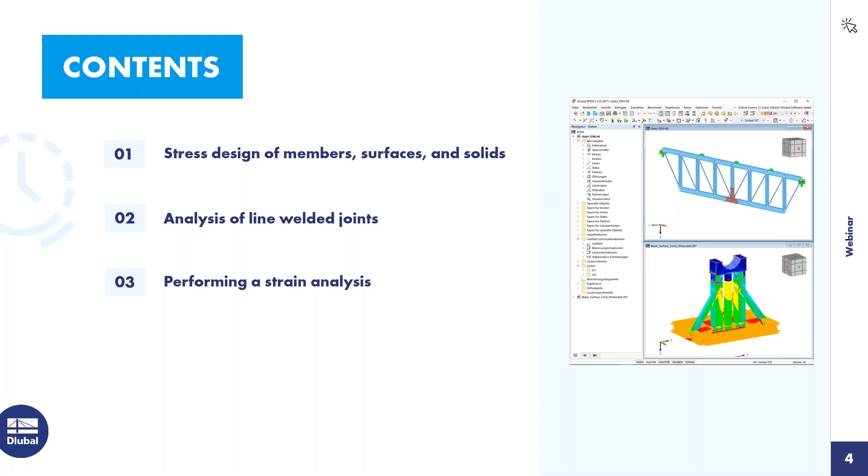In the last chapter, I intend to show the strain calculation, of course, in combination with the plastic material behavior. I will do it as a live demonstration, so I didn't prepare any additional PowerPoint slides, so I will jump directly into the program. And today I also would like to work with predefined files in order to keep the focus on the essential topics.

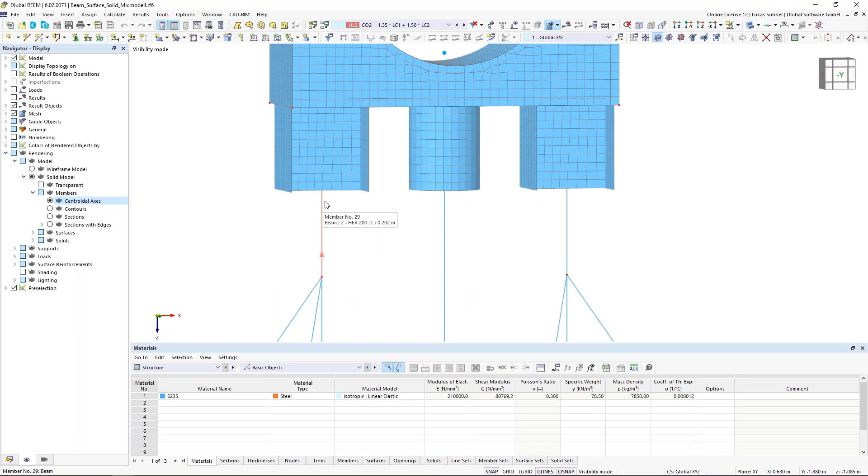What do I have here? I have a mixed structure here, mixed by the meaning of I have here a member structure, surface elements, and also solids. Let me quickly change the rendering so you can easily see the differences. On the bottom, we have this member structure. Then I converted a certain part of my members into a surface structure, as you can see here. It's just the continuation of my members if I display them again. And on top of that, I have my solid model on which I will place some loads.

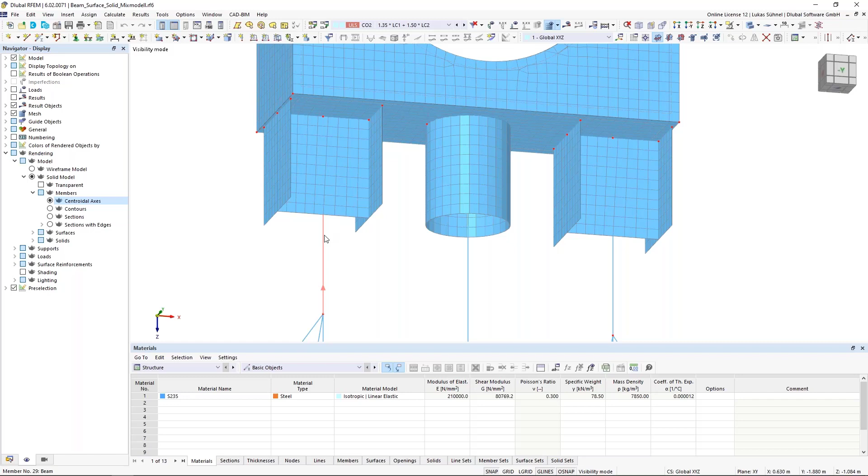Regarding the modeling, which is maybe also interesting to know, we have here this. So in general, we can model members, surfaces, and solids in one structure, which is already quite nice. And if you think about the load transfer and the correct transfer of the stiffness, you have to take care of some things when you have 1D elements and 2D elements. By simply converting these members into surfaces, as I did it here, often you don't have a correctly defined connection. You can see it on the left.

The surfaces in that area are now basically supported on only one FE node, the FE node where this member connects to the web of this beam. That is of course not correct. You would definitely get singularities in that area, and the stiffness transfer is also not correct.

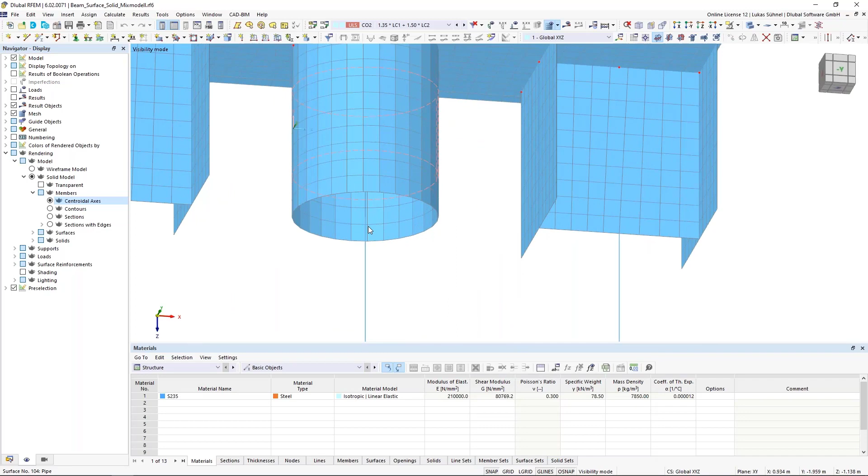Another example can be found in the center. We have here a pipe section. And when you convert a pipe section into a surface, you get, of course, the pipe surface. And in such a case, you have no connection at all. You can imagine the member is in the center of that circle, and the surface is of course not connected to that member at all. So here we also have to do some modifications in the modeling to have it properly connected.

And I have it here, I just didn't show it so far. So I will cancel my visibility mode, and the connection can be done in, let's say, 2 ways. I can use so-called rigid surfaces, and this simply will transfer all my forces and my deformations that I have in this beam, or also vice versa in that surfaces, via a stiff surface onto the other side.

In the center, it's even more crucial, because with this stiff surface or rigid surface, I'm connecting my member with my surface. Before, I had no connection at all. And again, of course, all deformations and internal forces will be transferred from the beam to the surfaces equally, let's say. An alternative modeling is visible here on the right-hand side.

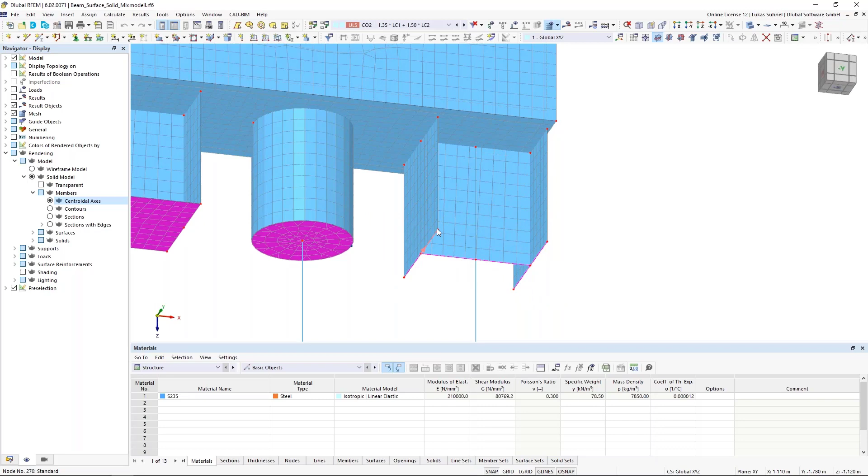Instead of using a rigid surface, I simply assigned rigid members onto the boundary lines of my surface model. A member with a member type rigid, and it works similar to my rigid surface. So this is how you can connect a 1D element with a 2D element. The rigid surface or rigid member may help you here.

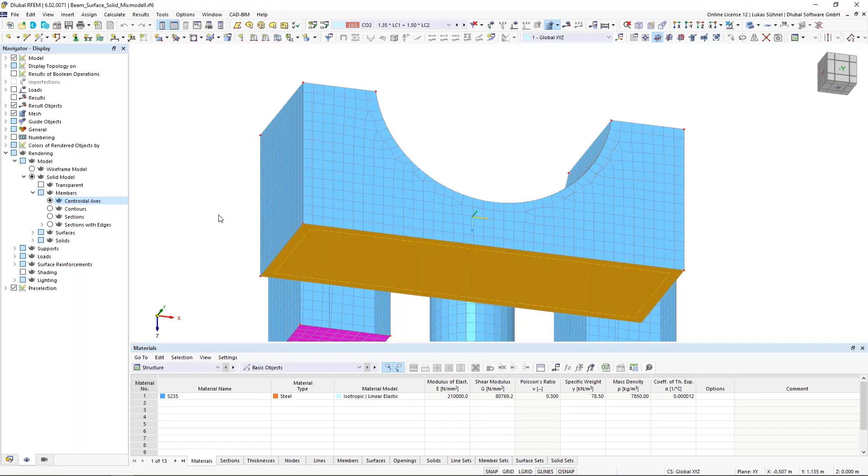Regarding the connection of a surface model with a solid, well, this is quite easy. The surfaces are defined by the boundary lines. These are those lines here, which you can see, and these lines are placed inside the boundary surface of that solid, and we have a so-called automatic object detection in those surfaces.

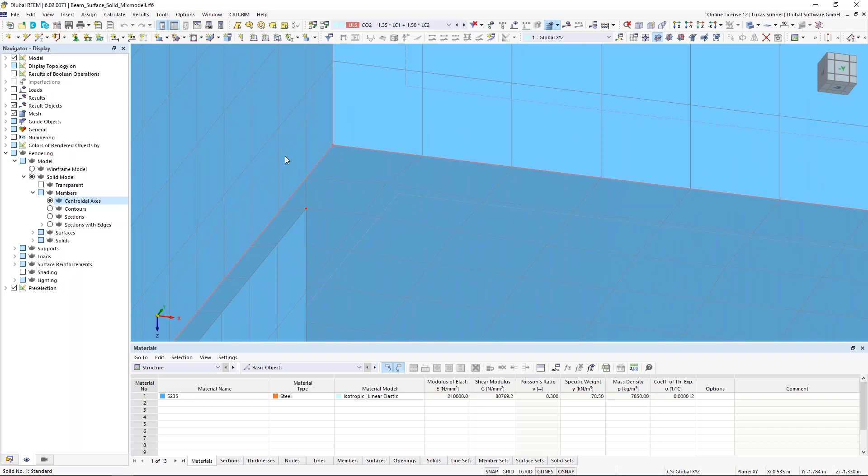So the surface detects that there are lines placed inside the surface, and if that's the case, then the FE mesh generator will automatically consider those lines when the mesh will be generated. So we have a fixed connection between those lines or these surfaces and the solid. So far regarding the modeling.

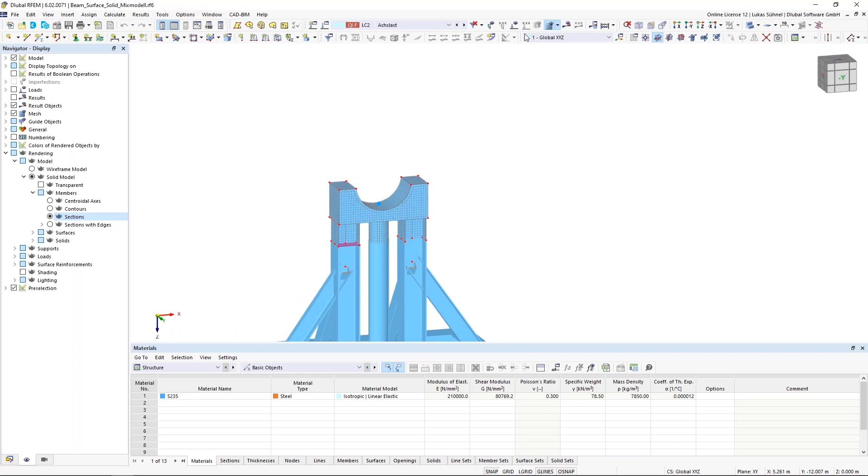Regarding the loading, these are German names, never mind. I have 2 load cases. I have my dead load case here, and then some load in my live load case. That's all I want here in that example. And of course, we have the combination of those load cases using an ultimate limit state design situation and a serviceability limit state design situation.

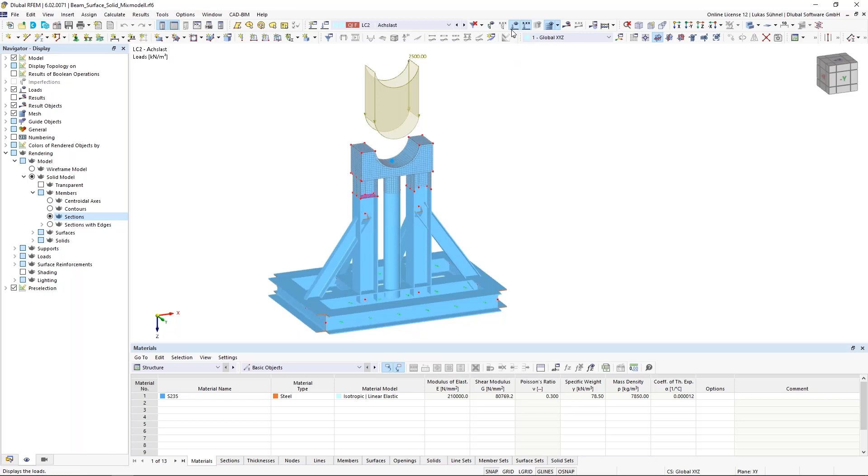Now, if we want to design such a structure, we have, let's say, 2 main designs that we have to run. We have to run a stress analysis or a cross-section check for our objects, and we have to run a stability design. Regarding the stability design, I would like to take a look at the results first. So that's what I will do now.

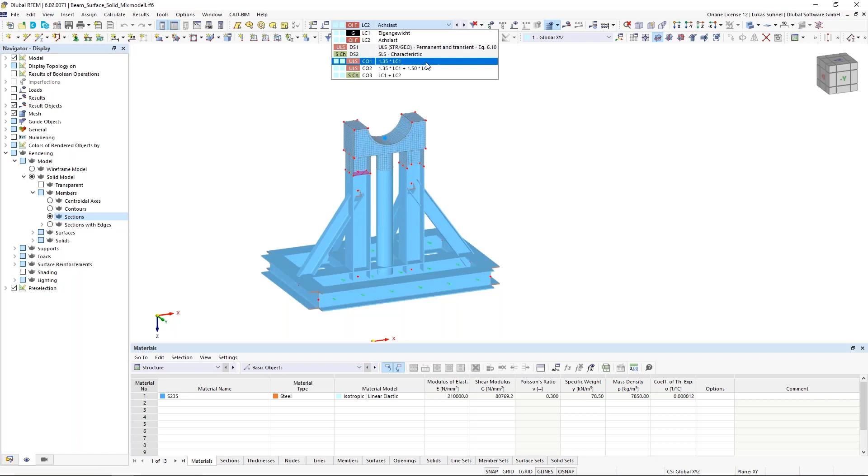I will calculate the, let's say, important load combination. I have just one here that actually matters, the combination of the dead load and the live load. And let's have a look at the results, maybe just on the members for now. I can display the internal forces in here, maybe in a different view like that.

All right. And what I can see here is I have, of course, compression in my, let's say, columns or in my members. So compression is, of course, a sign for buckling. So if I have compression in members, I have to check buckling. And what else do I have? I have some shear forces inside, but they are really small. So shear buckling is most likely not an issue. I have really small torsional moments.

I can neglect them. And my bending moments, MY and MZ, are also quite small compared to my cross section or to the dimensions of these beams. So I would say also the bending moments can be neglected. What does it mean? If I neglect the bending moments, then lateral torsional buckling is most likely not an issue.

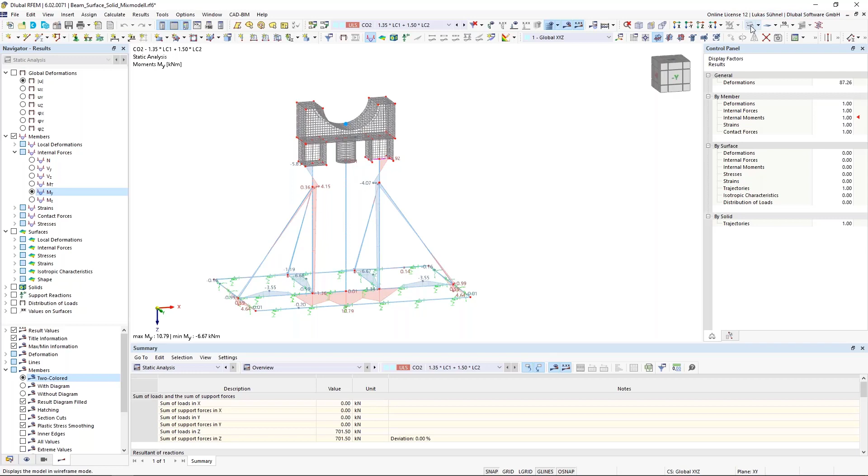And if I check again my structure, I have all these diagonals here that are connecting to my columns, a pipe section, which is where lateral torsional buckling is not important at all. So I think it's fair to say lateral torsional buckling is not an issue here. What could be an issue is, of course, buckling.

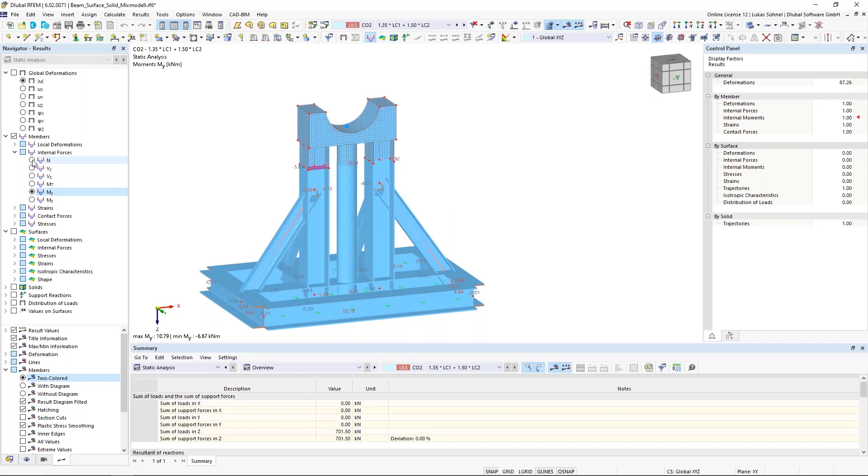But for buckling, I can use some limit checks or, let's say, some specific checks to judge if buckling is actually an issue. And such a check can be found inside the Eurocode 3 in chapter 6.3.1.2(4).

The formula basically is you take the axial force in a member and divide it by the critical force of the member. If that is smaller than 0.04, you don't have to run a buckling check for that member. If we switch it around and say the critical force of a member divided by the existing force is bigger than 25, then buckling is not an issue. This is a value we can check via a specific add-on.

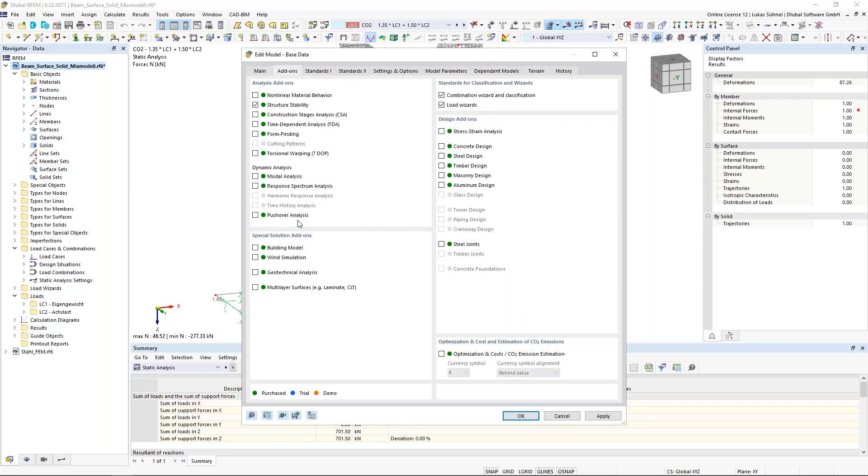I want to do this quickly before I start the stress strain analysis. So if I go into my add-ons, I can activate the structure stability add-on.

Now this will calculate the critical load factor, which is the same as I just said, the NCR, the critical force divided by the actual force. I will calculate it in this specific load combination. I can activate now the calculation of the critical load, and I will start the calculation.

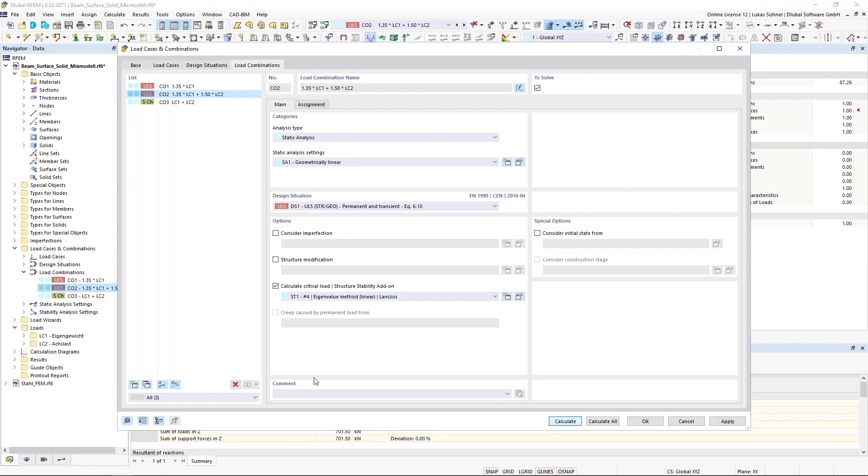So this add-on will calculate this critical load factor. It will also calculate buckling lengths and buckling length factors. For me, important is now only the critical load factor, and again, if that is bigger than 25, then buckling is not an issue.

Just a few seconds more. All right, there we are.

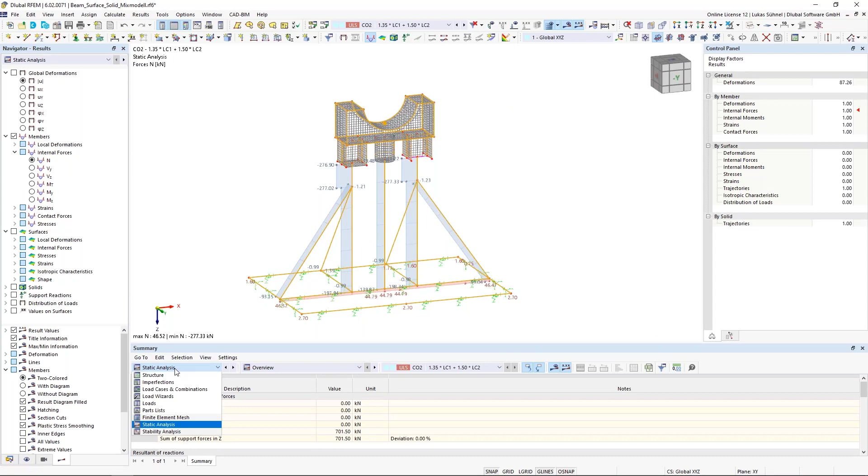So how can I display these results? Well, I can switch in my tables to this stability analysis add-on. The first value shown here is already the one I'm interested in: the critical load factor is 29, which is bigger than 25, so I'm good.

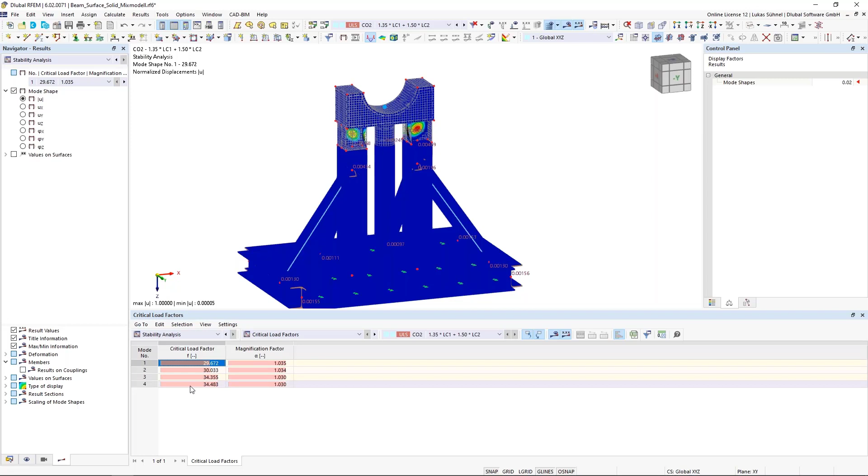If I want to analyze it further, I would have to look for an eigenmode that actually deals with the buckling, for example the fourth eigenvalue eigenmode. Here we see this would be some kind of buckling for my columns. I have the factor 34.5, so much bigger than 25, so I can easily say buckling is not an issue.

Now I excluded buckling and lateral torsional buckling. That means it is enough to simply run a stress analysis for the structure.

I can do it in two ways. First of all, I would like to check what result RFEM, the basic RFEM, gives me. So I go back into my static analysis results without using any add-on, and I can see that RFEM calculates the deformations, of course.

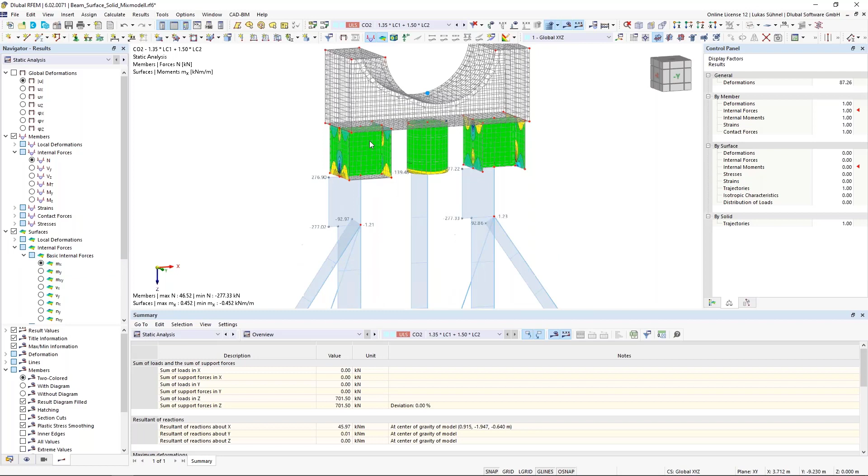It calculates the internal forces in members, the internal forces in surfaces, and so on. But it also gives me the stresses in members, for example the equivalent stress according to Mises. It also gives me the stress inside surfaces, and of course also in my solids.

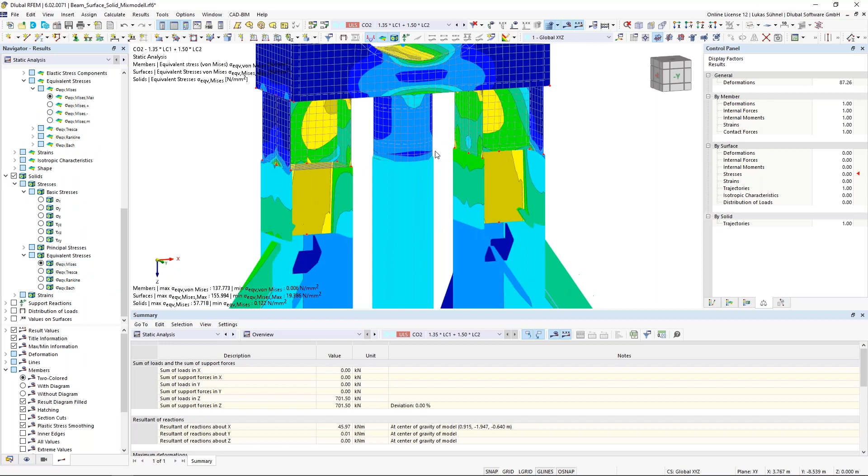So now I'm displaying the stress on all elements. You could use the information in this panel on the right-hand side, or the max-min information on the bottom left of the graphic window, to see that the maximum stress for members, surfaces, and solids is below the yield stress from my steel S235, 235 Newton per square millimeter. We are below the limit, so the stress check is fine.

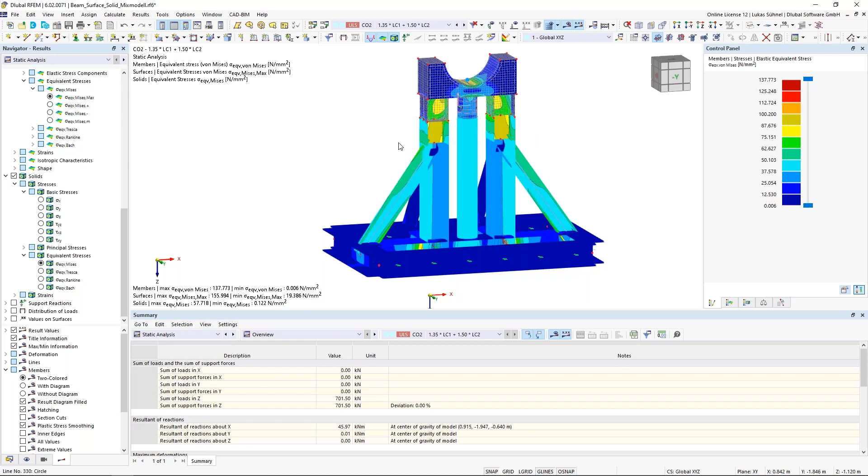Now, if you prefer a design ratio, not just a graphic which shows that stresses are smaller than 235, you could use the stress strain analysis add-on for that. So let's check this out as well.

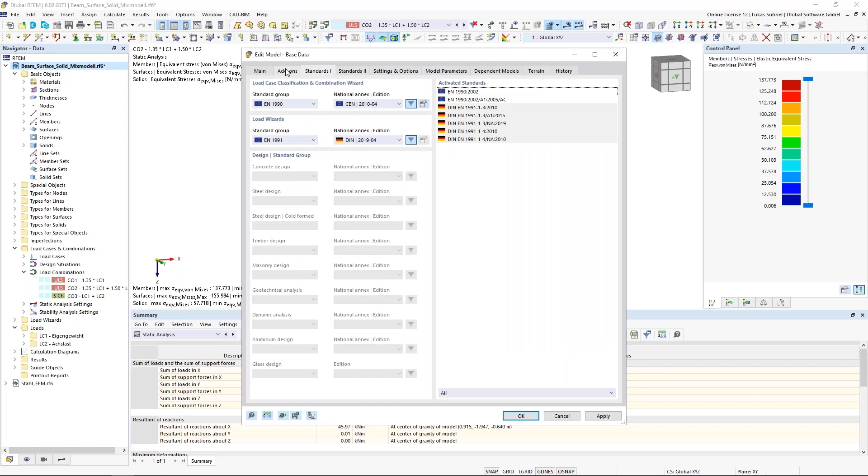I will activate the add-on in my add-ons tab, as I did before with the structure stability. The stress strain analysis add-on can be found on the right-hand side under the design add-ons. Usually we have to deal with standards—if we run a steel design or concrete design, the standard is important. The stress strain analysis add-on is standard independent, so we don't care in that case.

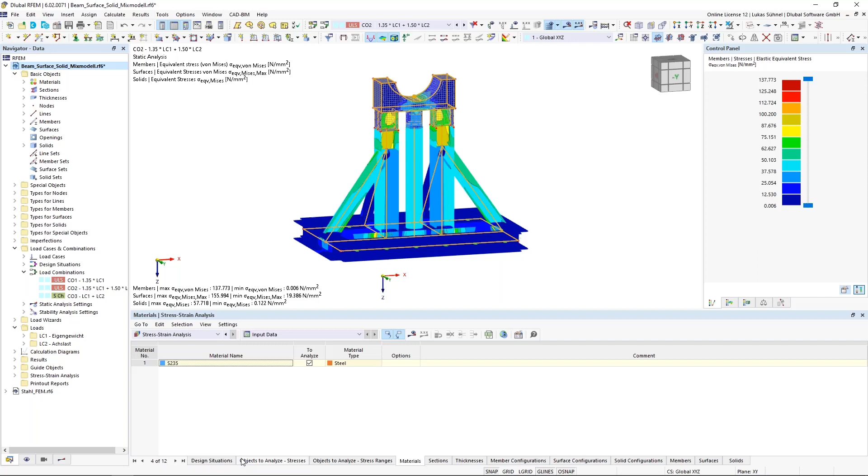Now, when you activate an add-on, you get a new entry in the tables, and this is how I personally usually deal with add-ons. I go into my table on the bottom and click through these subtables. Let's do it for this example.

Just use a different display. I'm here in the input data in the first subtable, design situations, and here I can decide which design situation should be analyzed. Of course, it makes only sense to analyze the ultimate limit state and not the serviceability limit state design situation, so I deactivate the second one.

In the next table, you can select which objects you want to analyze. Here, all objects are selected. Of course, you could select the surfaces or the members that you want to analyze if it's not all of them. In my case, I will simply analyze all.

There's another table which looks quite similar, but this is called objects to analyze stress ranges. So if you want to run a fatigue design afterwards, that's what you have to do, and for this design you need the stress range, so the difference between the maximum and the minimum stress on a certain location. Then you can also select those objects where you need the stress range for. So in my case, let's say I need the stress range in my solids, then I'm selecting the solids.

The additional tables are, let's say, more or less for an overview. You can see which materials and which sections will be analyzed here. And the section and the thickness table have one additional functionality that I would like to mention briefly.

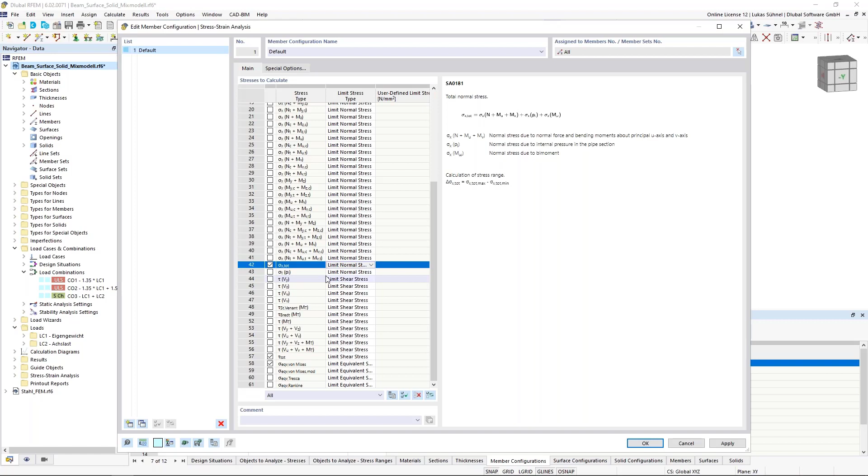So with a click in this table, you select which stresses you want to calculate, and with the center column, you can also define the limit stress. You can see here the limit normal stress, limit shear stress, and limit equivalent stress is selected. We try to do it automatically for certain materials, but for some materials we can't. In that case, you can select user defined, and then you can enter a value in the last column. In my case, I'm using the limit normal stress.

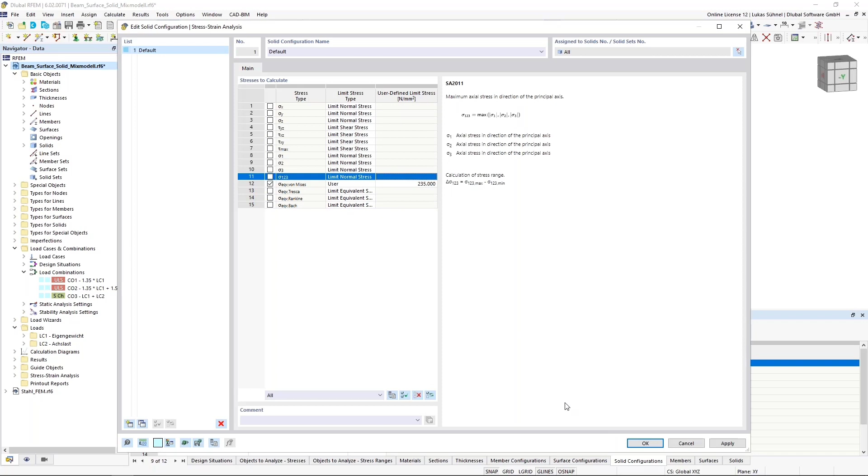For the surfaces, the same configuration basically - let's select only those two. And also for the solids, we have a configuration. Again, I'm only interested here in the equivalent stress according to Mises. And just to show it, we can enter here a manual value, maybe 235 Newton per square millimeter for my material, which is an S235. So that makes sense.

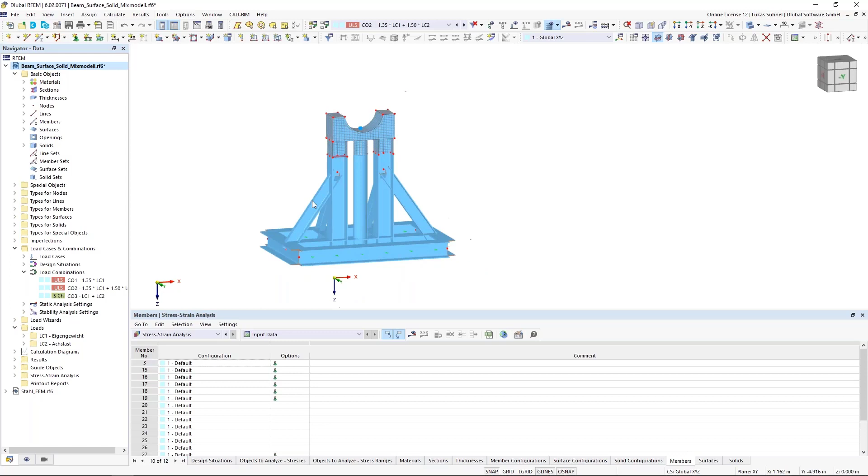In the last tables, you can assign the different configurations that you may have to your members, but you can also do it graphically. So let's say you have multiple configurations for your members, you can edit the members and simply assign the configuration in that window to them. So the handling, I'd say, is quite easy. We already finished with the input, so we can run the analysis.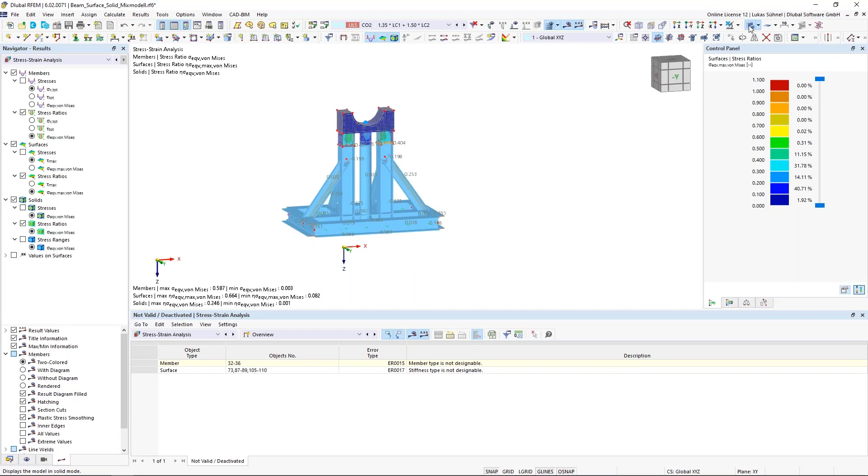All right. So after the analysis, we get results graphically and also in the tables. Let's start with the tables first.

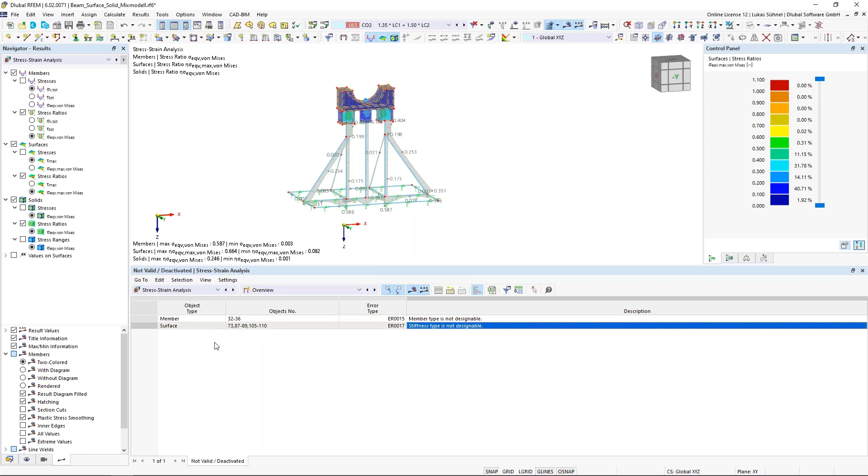If there are design checks which are not fulfilled, or you have selected objects that can't be designed, then you get an overview table. If everything is okay, you won't see this overview table. Just in case something is not correct or you get a warning, it will show up as shown here. We can see that for some members and some stiffnesses or surfaces, the design is not possible.

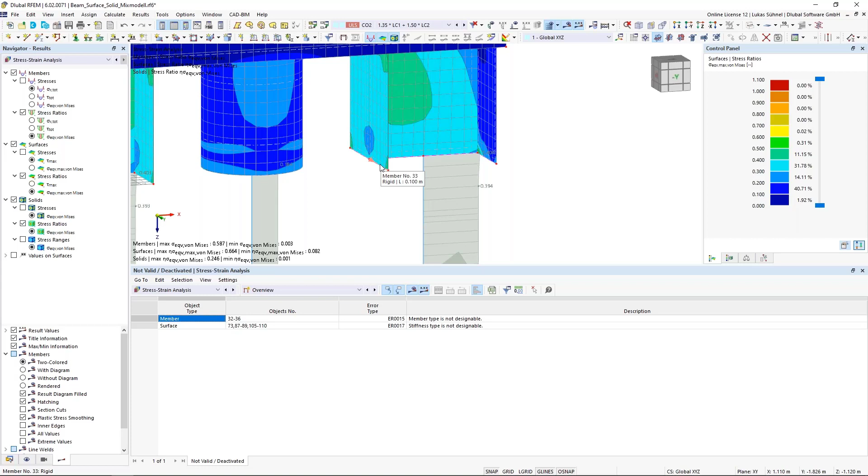That's nothing which should bother us. At the beginning, we said please design or analyze all members—all members also included the rigid members. That makes no sense, basically. We have no section for them, we have no material assigned to them, so we can't analyze them in this add-on. That's what it tells us here: they are not designable. The same, of course, applies for the rigid surfaces. So nothing we have to worry about in that case.

If you want to see the details of the results, we can go into the stresses on members tables, or stresses on surfaces and stresses on solids. This is the stress table output, with different filters by design situation, or for each surface the maximum stress, or for the various thicknesses we have assigned. These are the filters basically for the results.

We can also display these results graphically. On the left, you can see we have an updated result navigator now for the stress strain analysis results, and here we can select the stresses in our members, on the surfaces and so on. I think this is quite clear how to handle that.

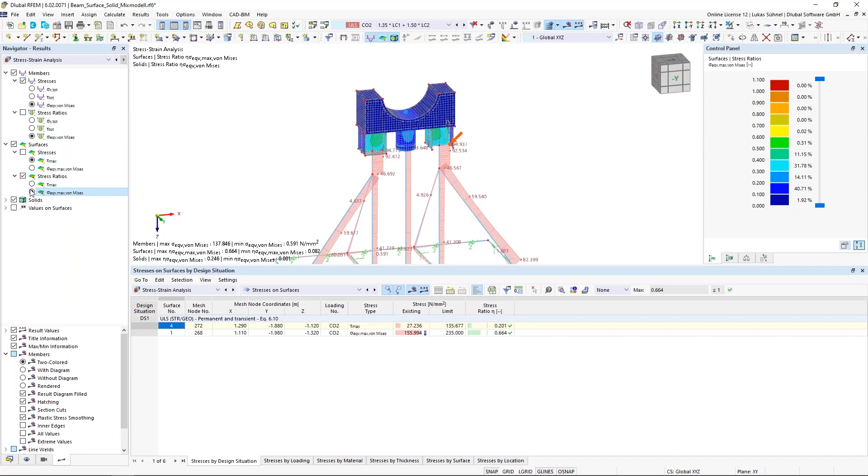And the last information here, we also selected the solids for a stress range analysis. Again, those results can be found in the tables. This table looks a bit different, as you can see: you can see the minimum stress, the maximum stress, the range, the difference basically, and you can also see from which combination or combinations this stress range is linked to.

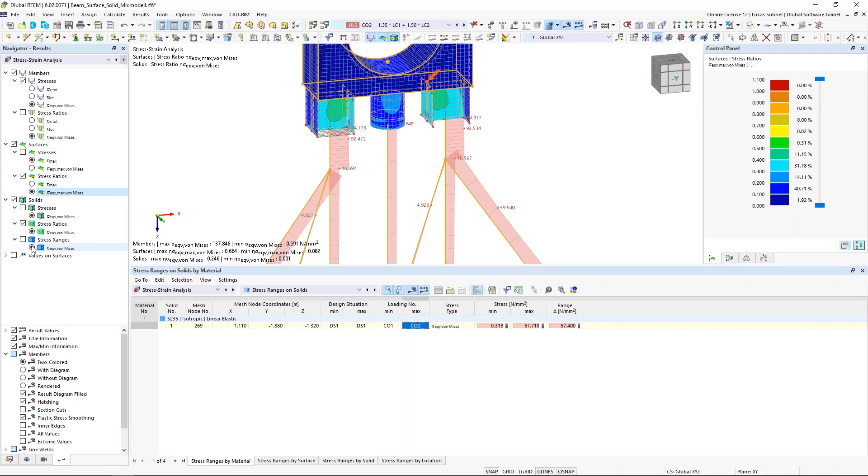All right, again, we could display this graphically. So far regarding this basic functionality, the stress analysis on members, surfaces, and solids.

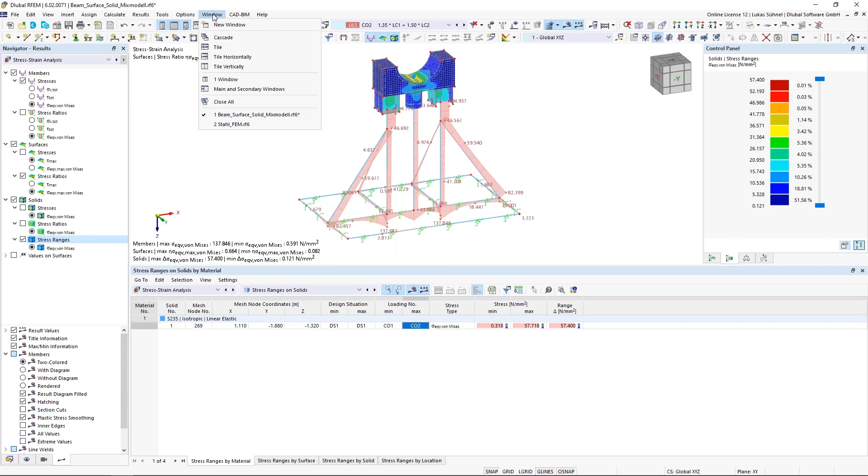Now I would like to switch to my second chapter, where I would like to show you the stress analysis of a line welded joint. For that, I have a different structure. Let me quickly explain it. It's a 2D truss member. Basically, the tension forces will be taken over by these round bars, the compression by these HEA sections.

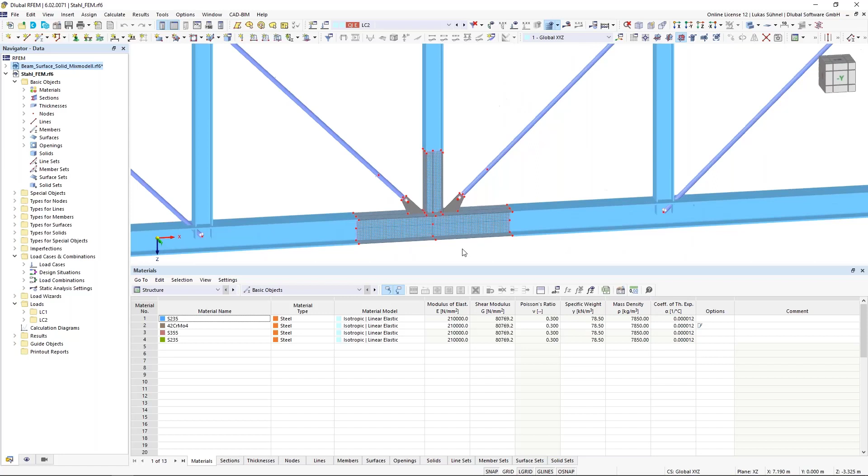One particular detail joint I wanted to analyze with surfaces, basically. You can see the rest of the structure is again a beam structure, a 1D element structure, and this specific detail I want to analyze in detail using surfaces. I modeled the connection plates here.

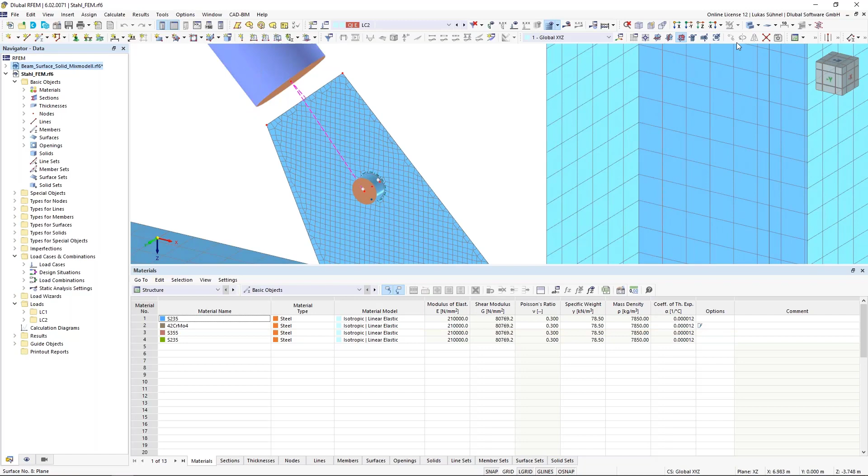These tension members are connected to this bolt, and this bolt transfers then the forces onto my connection plate. The force transfer, for those who haven't seen that before, can be done like this. Usually you create an opening inside that surface, of course, where the bolt goes through. But if you have a bolt in the center as a member element, it's not connected to the surface. So somehow you have to establish this connection between, let's say, this node and this connection plate. This can be done using a specific surface. So I filled that hole with a surface, and that surface has a stiffness type without membrane tension.

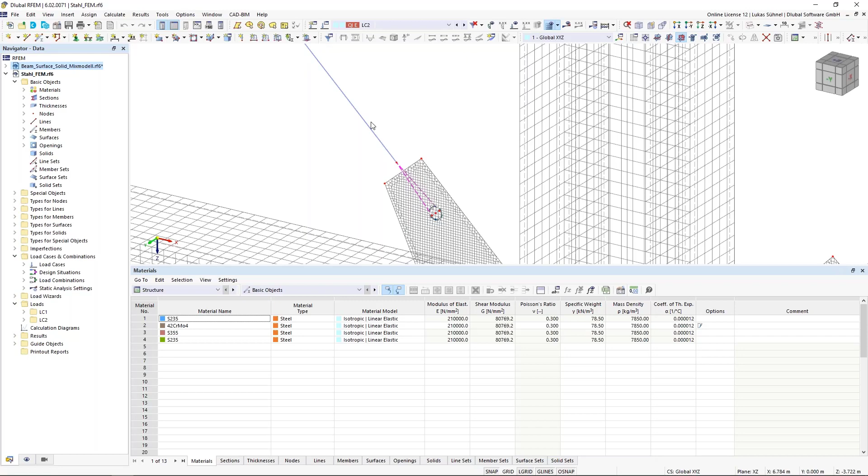This specific type simply acts only under compression. So you can imagine if we have tension forces in that tension member, then the bolt will move, let's say, to the top left now, upwards, and we will get compression in that area. We will get tension on the back side of this plate, but since this surface will fail under tension, we have only forces on the left-hand side. This is, let's say, a good feature to consider this connection between the bolt and the hole.

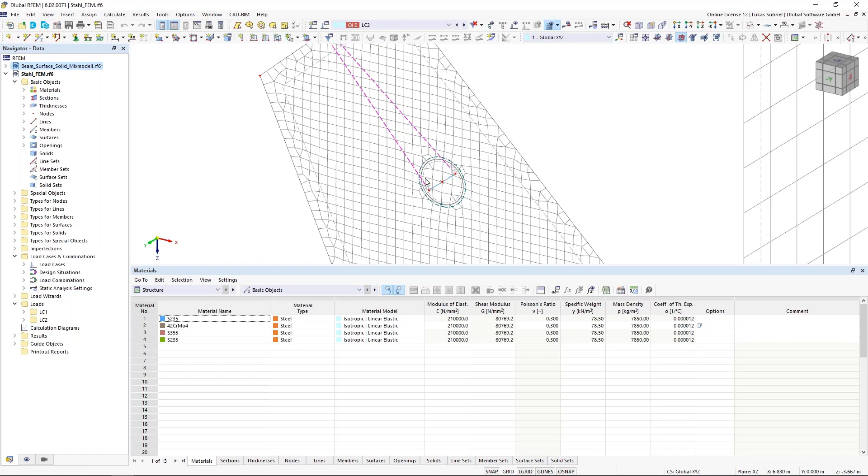All right, so far regarding the modeling, I have of course my steel connection plate here, and the steel connection plates should be welded to the top flange of this I-section.

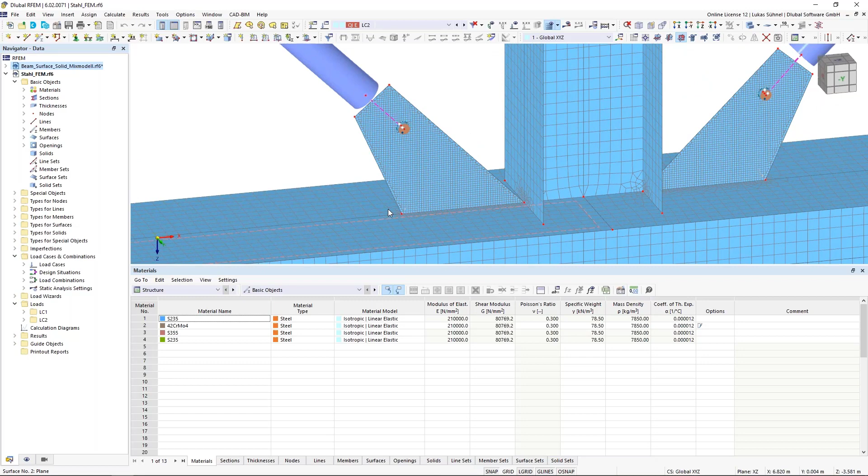Now, if I want to design such a weld, I can use this new object which we have in RFEM 6. It's called line welded joints. You can find it under types for lines, and you can define a new type in here.

Let's say this weld that I want to design is a T-joint, a single fillet weld, continuous arrangement, and the weld size is 4 millimeters.

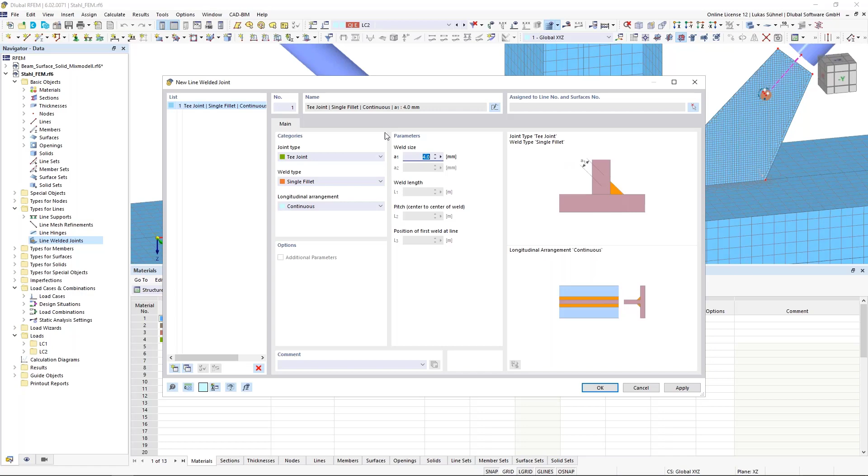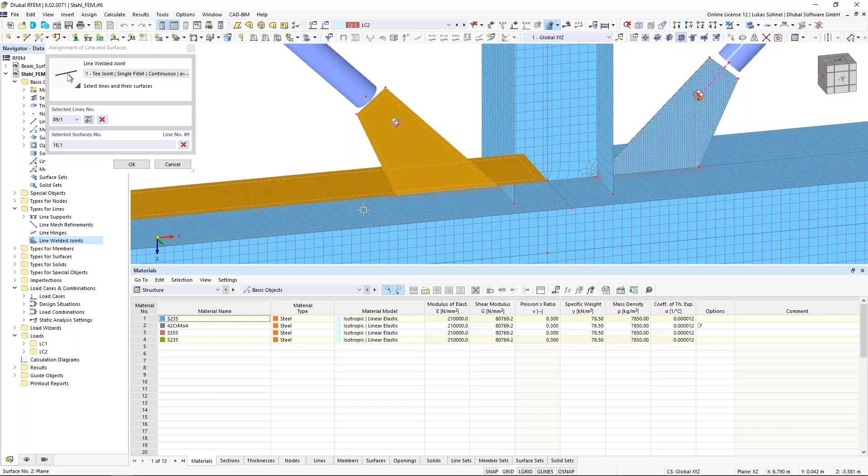So far, so good. Now I can assign this type to my lines, and the weld should be placed here, of course. It's not enough to just select the line, we also have to select the surfaces that are participating, basically the connection, the steel connection plate, and the upper flange of my beam.

That's how we can define such a line welded joint. We will show it as a dotted line on each of the participating surfaces.

And if you want to design such a weld, you need the stress strain analysis add-on. Basic RFEM 6 won't give you any results for that line welded joint, so it's required to have the stress strain analysis add-on. That's why I'm activating it again.

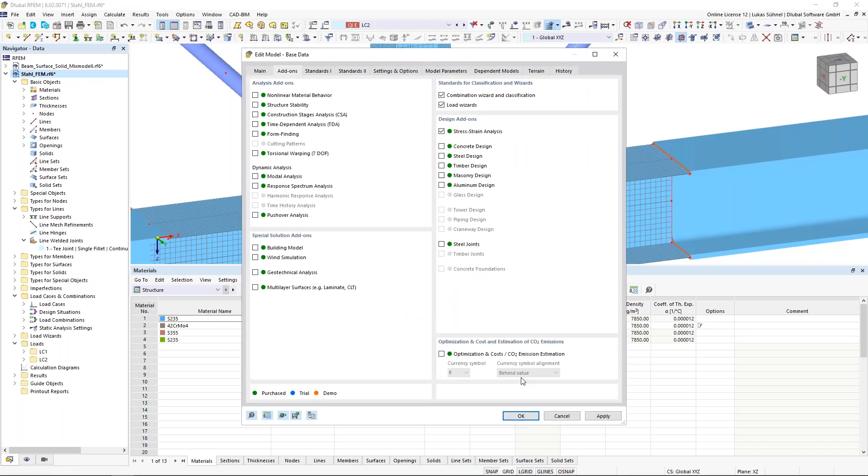Now let's go quickly through the input of this add-on. I'm starting again with the design situations. I think that is clear.

Objects to analyze: in that case, I don't care about the stresses in my members. I want to select just some of the surfaces that I want to analyze, not all of them. And of course, I want to analyze my line welded joint. Stress ranges, I don't care in that case here.

I will continue with the surface configuration. Again, I will select just some of the stresses, I'm not interested in all of them. Maximum shear stress, maximum stress according to Mises, is quite interesting for me.

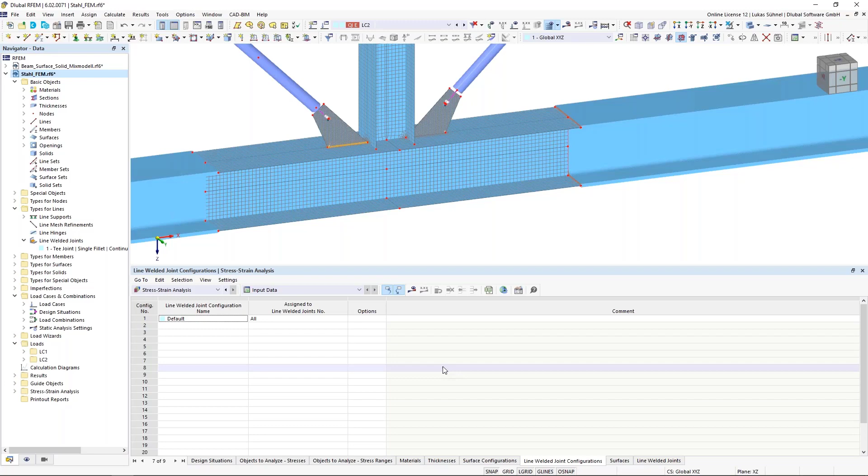And now we have also a new configuration for my line welded joint. Each specific object has its own configuration: surfaces, members, solids, line welded joints. In here, it looks basically the same. I can select which stresses I want to calculate.

Even though you select maybe all of them, not all of them will be shown. It depends. For my fillet weld, which I have here, I have two different methods, the simplified method and the directional method, for example. Let's say we are using the simplified method. For that method I only need the following stresses, those four, and the resulting weld stress. If I select the others as well, they won't show up in my result table, because they are not part of this simplified design method. That's why I select just those four, those five.

Same logic as before: when we select the stress, it means we tell the add-on, please calculate the stress for this specific stress type.

By default, we do not get the limit stresses for the welds. You can see it here, it's selected as none. Why is that the case? Well, we are standard independent in that add-on. That means the limit stress for welds is, however, standard dependent usually.

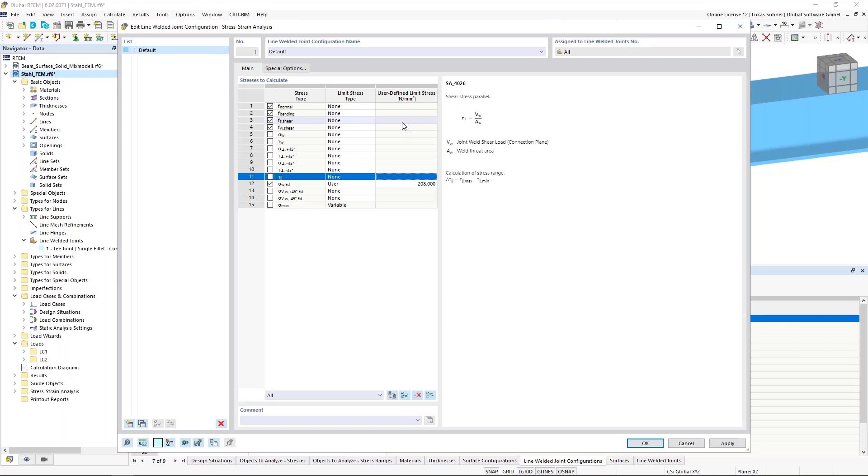Let's say we assume here a Eurocode design, then the limit stress for this simplified method would be fu divided by square root 3, divided by beta W, multiplied by gamma M2, which is 208 Newton per square millimeter. I could also enter this limit stress for the other types, but it doesn't matter, I only need it for the resulting stress.

All right, so far so good. I defined all necessary inputs, and now I can run my stress strain analysis again.

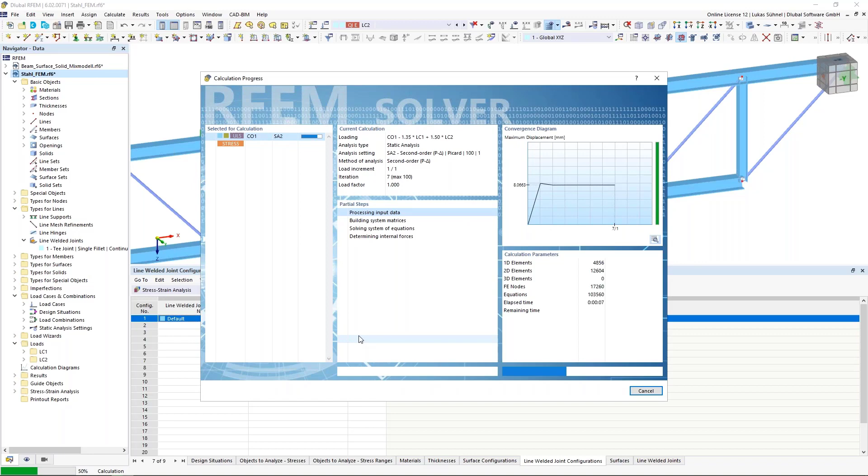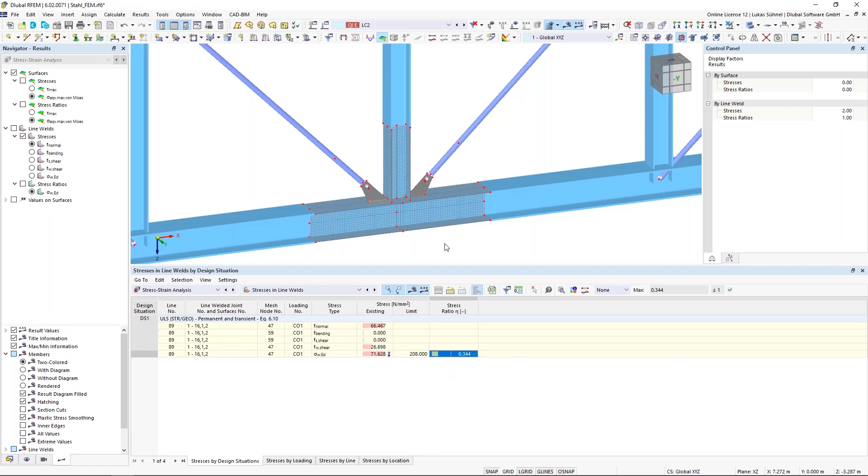Okay, I get the overview table. It shows me some exceeding stress for my surfaces. I will take care of that later on. Now I'm interested in the line weld stresses, and we can see here we have an existing stress of 71 Newton per square millimeter, which is smaller than the limit. So we get the design ratio, and the weld has been checked.

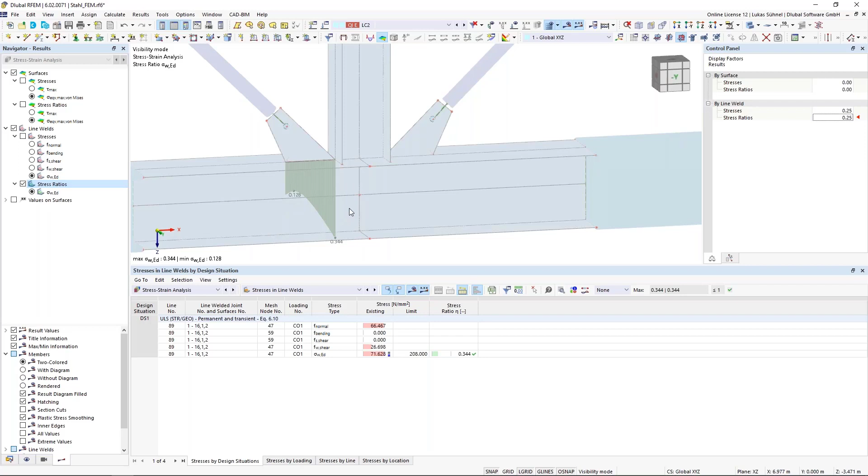We can also display the results graphically as usual. Let me show it quickly. We get the diagrams also shown here. Maybe it's better to select a specific visibility for them. The different stresses, normal stress, shear stress, also resulting stress, and of course also a stress ratio, and that's it. You can of course print these graphics into your protocol as you are used to in Dlubal. The tables will end up in the protocol, so I think the post-processing is clear.

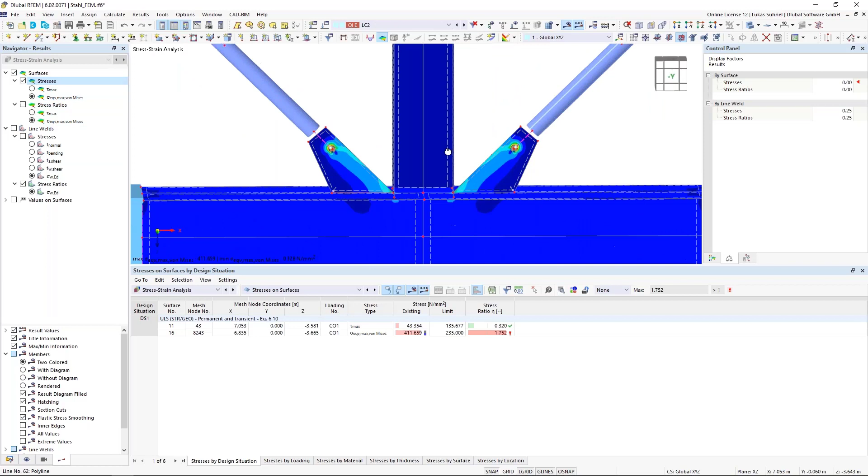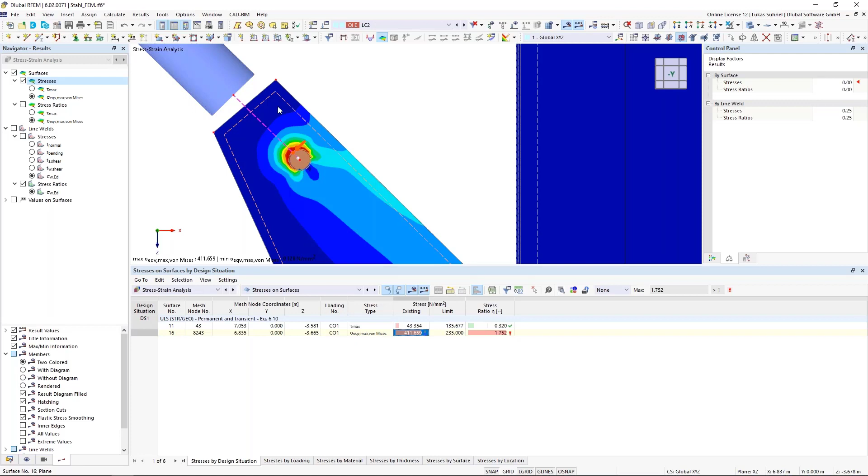So far regarding the line welds. Now let's analyze this exceeding stress in the surfaces. Let's display everything again. Maybe let's turn off the FE mesh for a second. And of course, we need the stresses in the surfaces. What we can see here in the table already is that we have an existing stress of more than 400 Newton per square millimeter, which is of course exceeding the limit stress. And by clicking on this table, we see this nice arrow, which shows us where the issue is. The issue is where the bolts connect to the connecting plates.

I think it's quite clear that such a stress cannot show up in reality simply because the S235 will yield when it reaches the limit stress. It can't get these kinds of stresses. The steel will yield, it will deform. So we get these high stresses because we use a simplified material model for our steel. The default is usually an isotropic linear elastic material model, which means we can get infinite stresses.

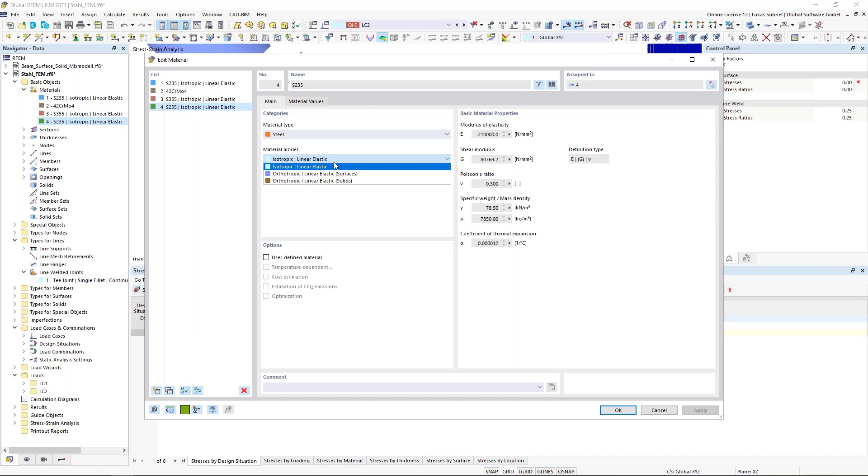Since this is not exactly correct, we could in theory use a different material model. The default material models are, however, only isotropic linear elastic or orthotropic linear elastic models. Plastic is not supported as a default setting. If you are looking for more advanced material models, you would need the Nonlinear Material Behavior add-on. I can select it here. And now you can see if I edit my material again, I have many more material models.

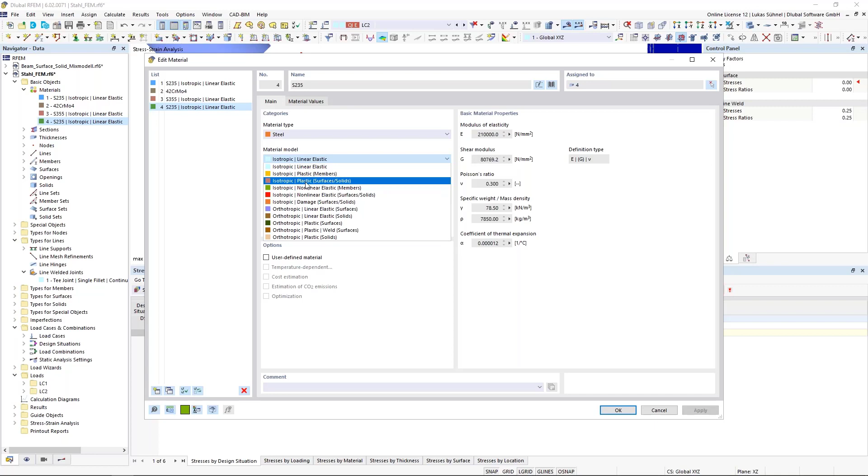For example, the isotropic plastic material model for surfaces and solids. That's the one I select. These are the parameters for this material model. I can select the basic, bilinear, or stress-strain diagram. I stick to the basic diagram type; that should be enough for my case here. I could select the stress failure hypothesis. This is fine for me, and that's all I need to define. If I assign this material model to my material, it will yield as soon as it reaches the yield strength of about 235 Newton per square millimeter.

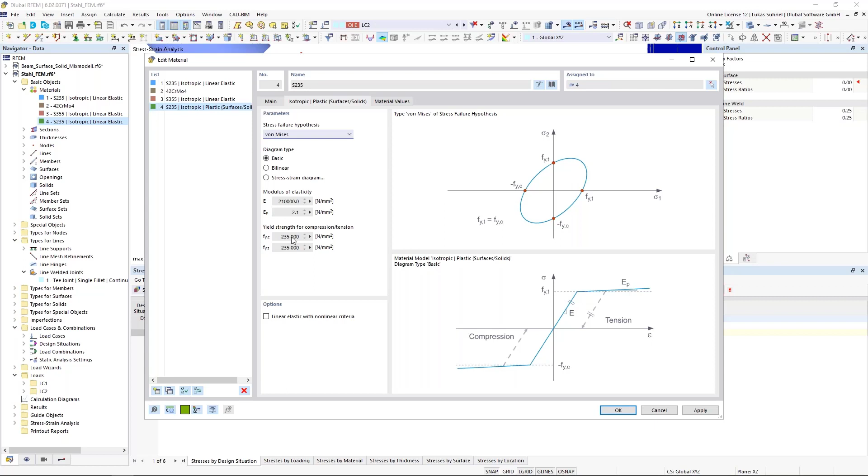How do we do this in the calculation? For that, I would like to show the FE mesh again. How do we consider this yielding? Well, you saw before that we had some stress peaks in this area here. The stress in those FE elements was higher than the limit stress. If that is the case, with the plastic material model, we will reduce the stiffness of an FE element.

So we take a look at each FE element and we reduce the stiffness of those FE elements where the stress is exceeding the limit stress. If we reduce the stiffness, they will deform much more, and the other elements with the regular stiffness will take over more of those forces until they maybe also reach the limit stress. Then we reduce the stiffness again, and so on. That's the logic we're using here. Since we do it on an FE element basis, we should also check the results on FE elements.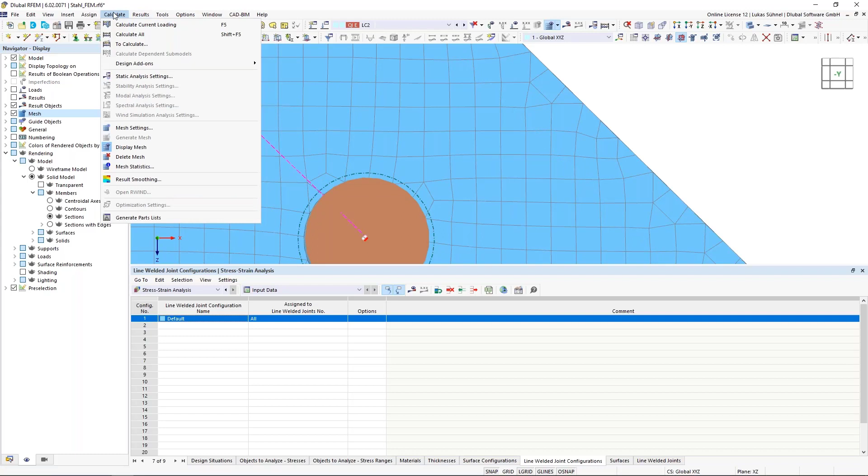What does it mean? I can go to my Calculate menu, under the result smoothing function, and select here constant on mesh elements. The default, I think, is continuous within surface sets or otherwise within surfaces. We get a result on each FE node, and usually we smooth those results so that they look nice. In this particular case, with this FE mesh specific look on the results, we should use constant on FE mesh elements. So we get this pixel-like look afterwards.

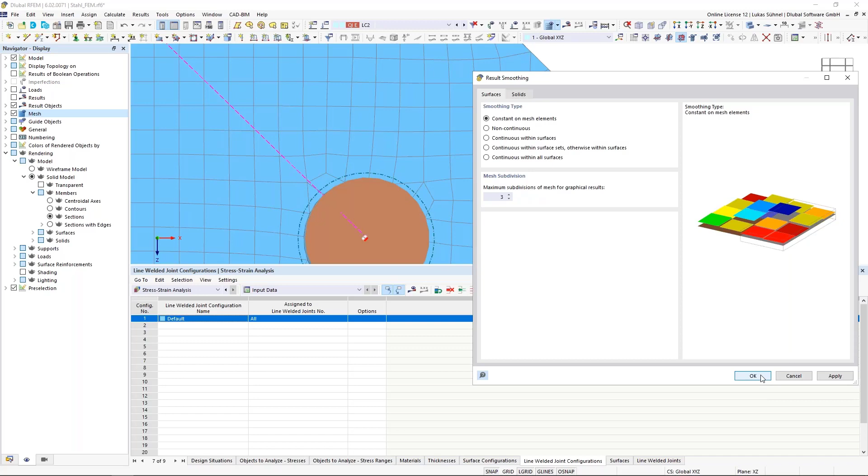This setting under calculate result smoothing is for the results of RFEM 6 itself. We have the same setting in our stress strain analysis add-on. So if I go on the bottom left, stress strain analysis settings, I can also select it for this add-on, which I'm doing here.

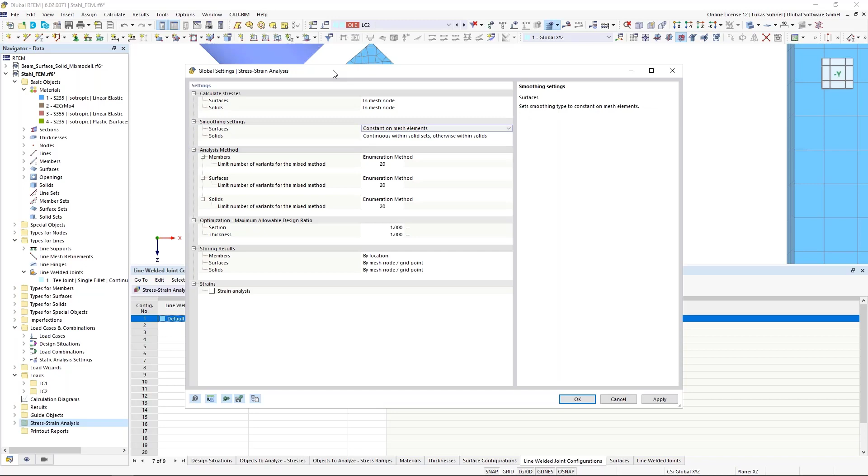So now I can recalculate the results, and small spoiler, we won't get any stresses higher than 235 Newton per square millimeter due to this material model. So the stress check is fine. It's not a big issue anymore, but that's not the end of the check. We will get higher deformations.

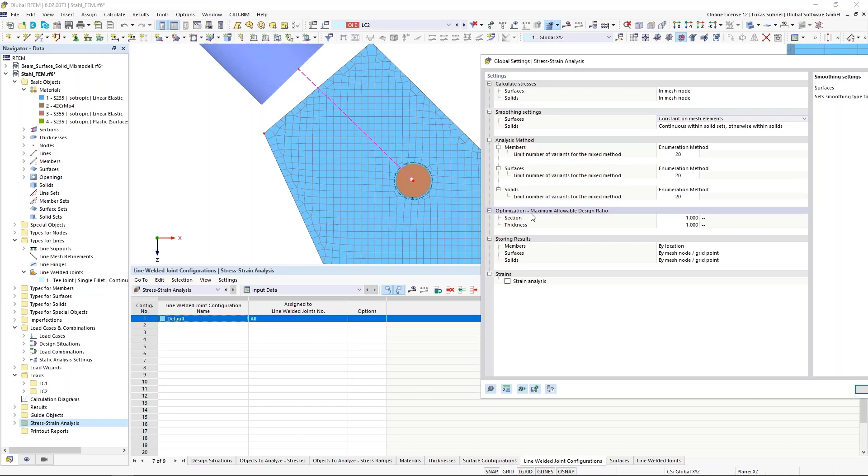We get these plastic strains probably in our structure, and that's usually what you look at when you use the plastic material model. You check the strains because the stresses are not relevant anymore. And we can run also a strain analysis inside the stress strain analysis add-on. That's basically what the module name is.

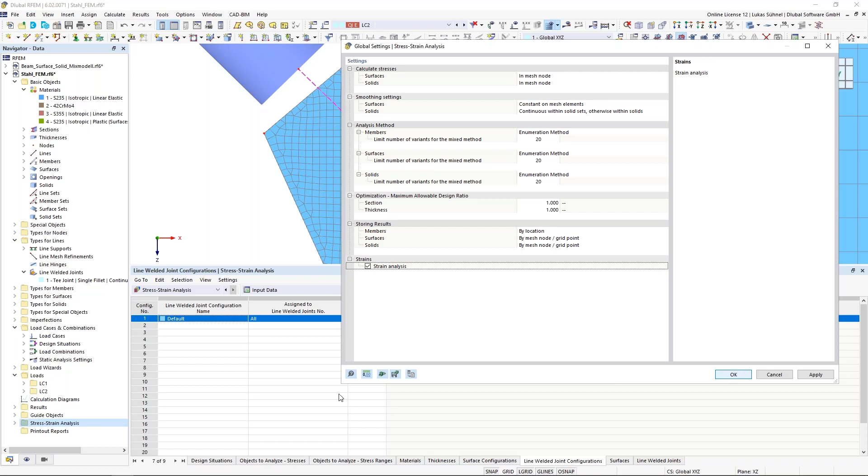Stress strain analysis. We can activate the strain analysis also in these global settings. Where I change the smoothing settings, I can activate here the strain analysis. I click on OK. And if I activate that analysis, I can go back into my surface configuration. And now I have this additional tab here.

It shows me now strains, and I can select which strain it should calculate. Let's say the Mises strain. And we also have a limit defined for that. We have a plastic limit strain of 5%. That's what we defined here. You can change it, of course, by simply clicking into it and defining a different value. That's what we're defining here as a limit.

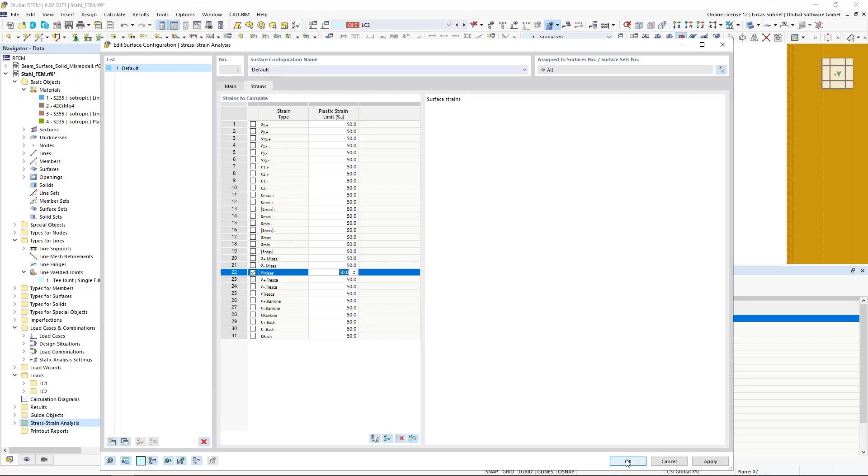Of course, you could say your limit is when the strain is so big that the bolt moved completely through your connection plate, so that the structure is unstable during the calculation. I'm not sure if that's the right limit. We defined here the 5%, but at the end, it's up to you. All right. That's all that I have to define here.

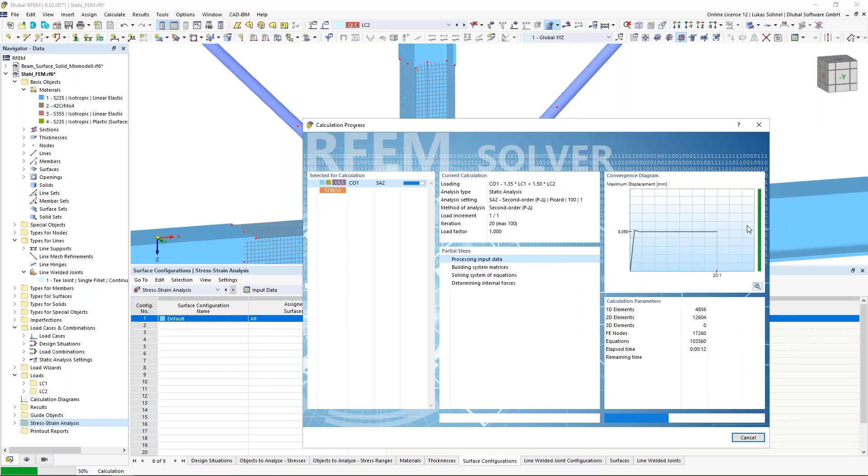Now I can run the stress strain analysis again. It will take a bit longer because now it's a nonlinear analysis. Each FE element is nonlinear, so we will need more iterations until we get an equilibrium, but still quite fast in that example. All right, let's have a look at the results.

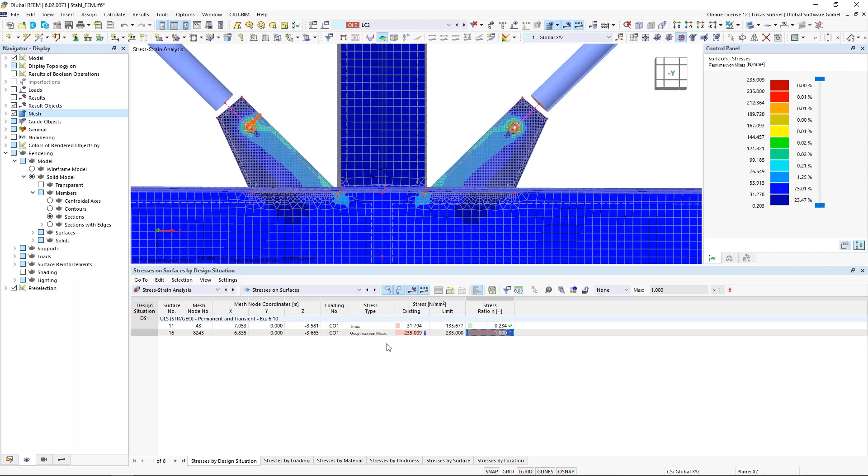I get the overview table where it says stress ratio is 1. If I check the details, it's just slightly above the limit. So it's just a numerical issue, not a big deal. We can neglect this. The stresses are, of course, fine, as you can see here. We have here 235 Newton per square millimeter maximum. We also have this pixel-like display of results. That's the result smoothing that I changed.

And of course, we can now also check the strains. As I said, this is now important. So instead of checking the stresses on surfaces, I can check my strains on surfaces. And this table looks also similar. We have an existing strain, 6.2 per mil. That's, however, the total strain. The plastic strain is just 4.4 per mil.

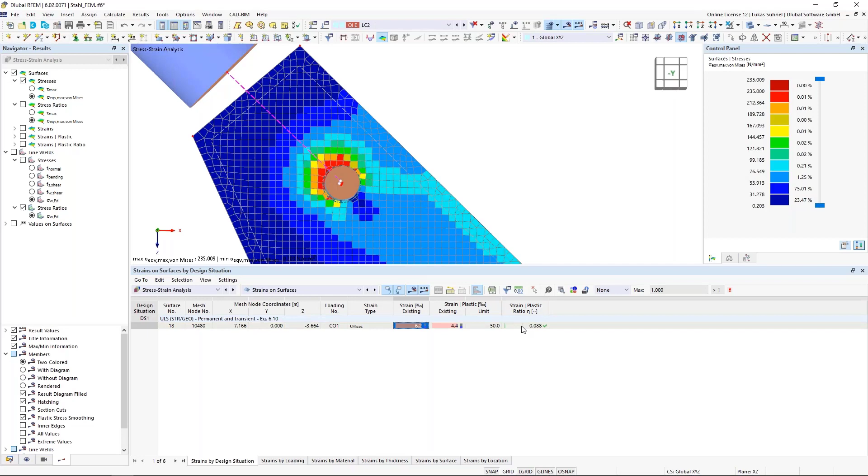And this plastic strain will be compared to the limit of 50 per mil, which results in this plastic strain ratio. So this is the strain design, basically. This is how you can do it with the add-on Stress-Strain Analysis. And that is also what I would like to show you here.

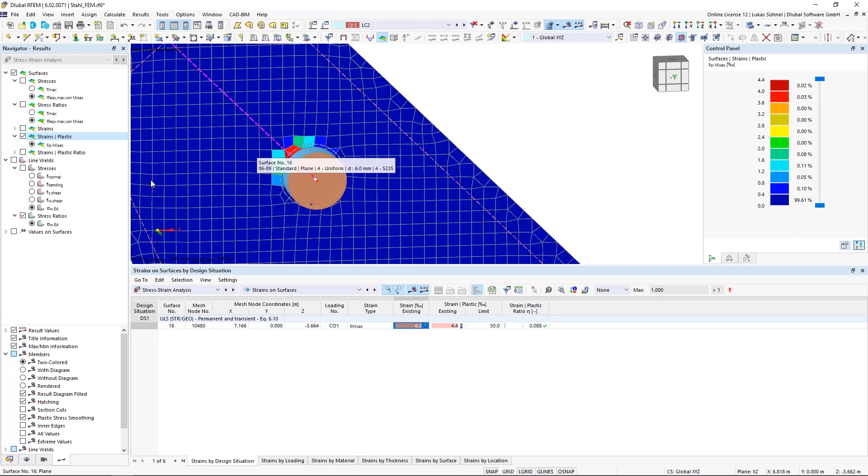Maybe what I forgot now, we have, of course, also the strains as a result graphically, the total strain, but also the plastic strain, which is always smaller. And again, also the plastic strain ratio. Well, not much to see here, but the plastic strain.